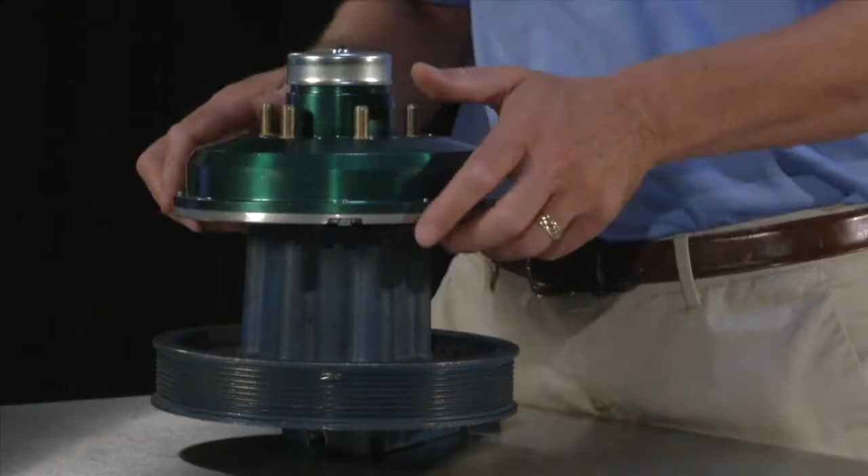All Kysor-style fan clutches are spring-engaged, but unlike the Horton-style fan clutches, where the pulley and clutching mechanism are one integral piece, these systems are always a two-piece design. The first piece is the hub, consisting of the pulley and the bracket. The second piece is the fan clutch itself. Once the two pieces are bolted together, you have the completed fan clutch assembly.

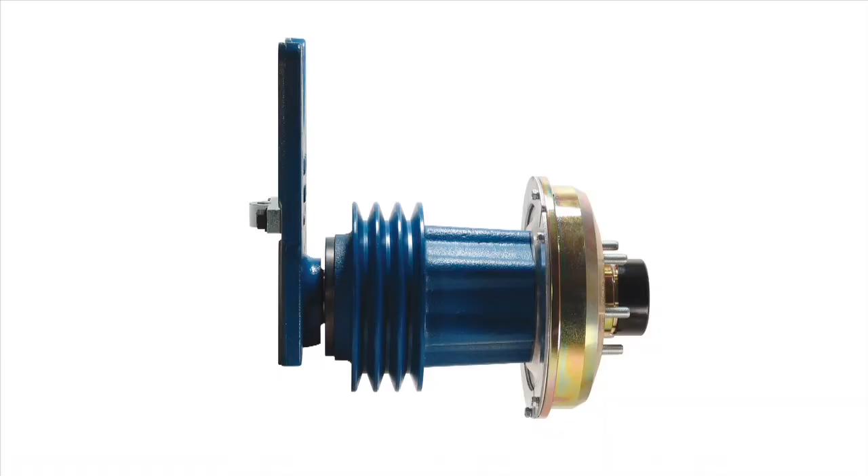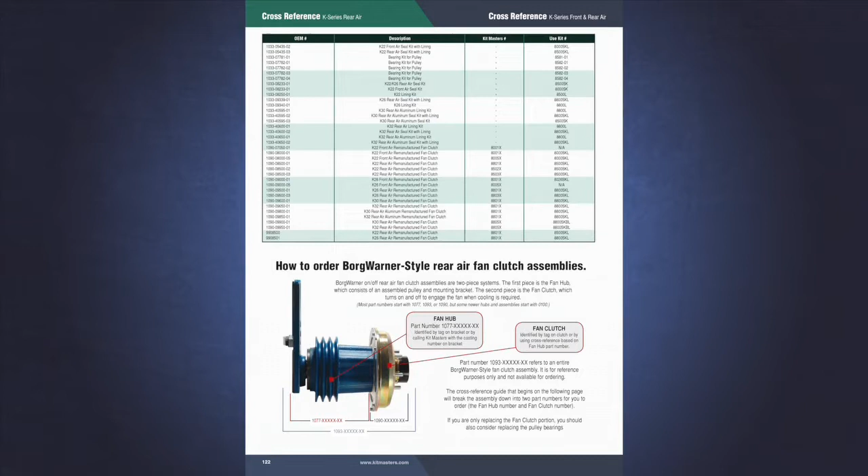Each of the two pieces in the assembly will have their own unique part number. Historically, the part number for the hub will begin with 1077, and the part number for the clutch will begin with 1090. The part number for the complete assembly will begin with 1093. In the Kitmasters Cross-Reference Guide, online or in the catalog, you can use these part numbers to find the appropriate Kitmasters kit, remanufactured fan clutch, hub, or assembly.

All Kysor-style fan clutches use a conical or wedge-shaped friction material, which helps to reduce slipping on engagement.

Although Kysor-style fan clutches are all spring-engaged and always two pieces, there have been various improvements to the design of the fan clutch itself over the years, and therefore changes in the part numbers. Here we will present a history of the progression of the fan clutch, their part numbers, and the technical changes. Understanding the changes will help you identify the proper remanufactured fan clutch or rebuild kit that you will need to use. As we go through the part numbers, you will notice that they are all indexed with a series number like K22 or K30. For this reason, these fan clutches are also referred to as K-series fan clutches.

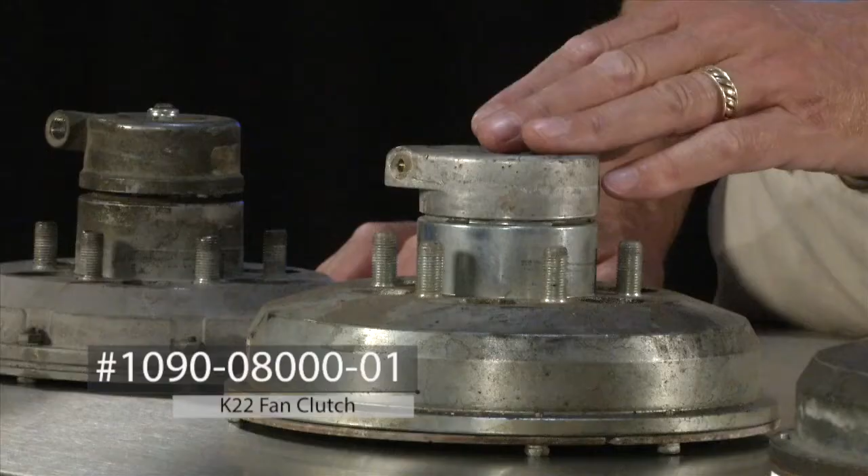The first of the K-series fan clutches was part number 1090-08000-01. This is considered a K22 fan clutch. There were several versions of the Kysor fan clutch prior to this; however, they were smaller, less durable, and quickly replaced by the K22.

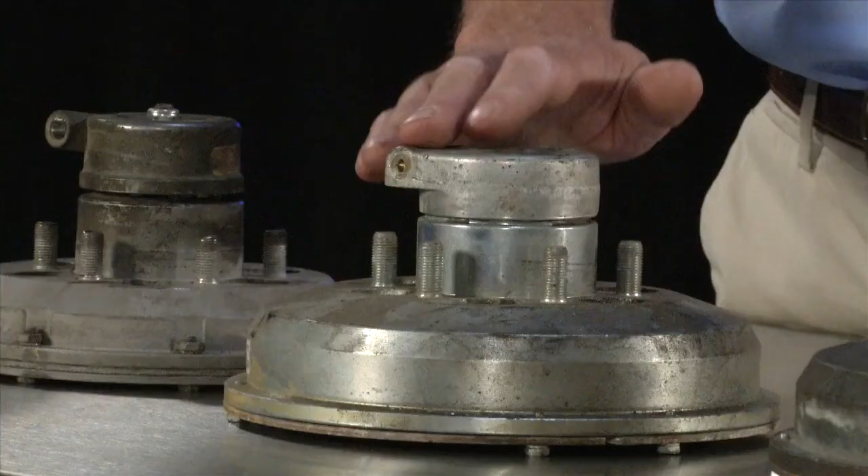The 1090-08000-01 is a front air fan clutch. This means that the air is supplied to the fan clutch through an air line that routes between the fan blade and the radiator and enters a port located at the front of the fan clutch. This fan clutch can be replaced with Kitmasters 8001X.

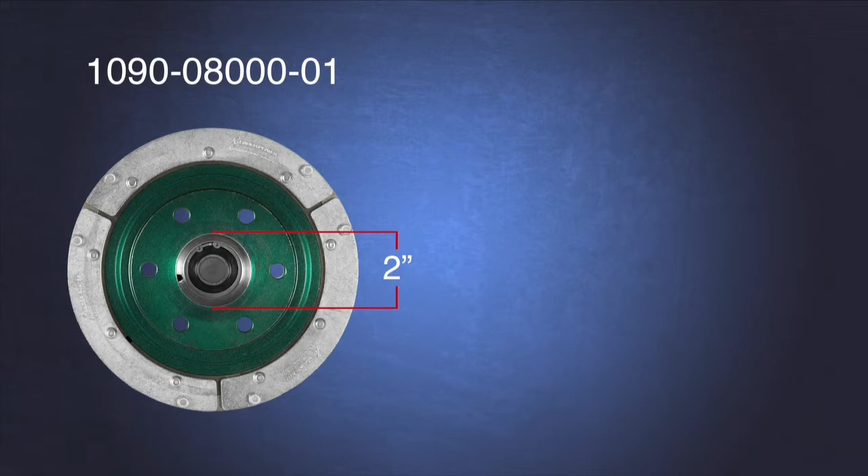The 1090-08000-05 is nearly identical to the 1090-08000-01, but has been specifically designed for Mack applications, since Mack bolts this fan clutch directly to the water pump. The only difference between the 1090-08000-01 and the 1090-08000-05 is the rear mounting pilot. The rear mounting pilot on a 1090-08000-01 is 2 inches, while the 1090-08000-05 is 2.56 inches. This fan clutch can be replaced by our 8005X.

There are also 3 rebuild kits for the 1090-08000-01 and 1090-08000-05: the seal kit, 8000 SK; the lining kit, 8000L; and the seal and lining combination kit, 8000 SKL.

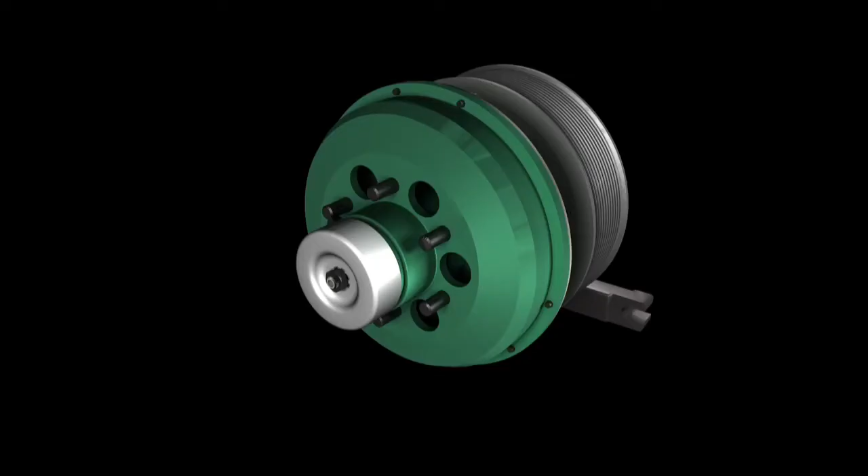By the early 1980s, the Kysor-style fan clutch was gaining popularity, but customers were complaining that the airline routing into the front of the fan clutch was burdensome, and because the airline would have tension on every engagement, it was a primary cause of failure. In 1985, the K22 fan clutch was re-engineered so the airline would route to the rear of the pulley instead of the front of the fan clutch. With this change, the air moves through a shaft in the pulley and is transferred to the fan clutch shaft at the rear of the fan clutch, hence the name change from front air to rear air.

The part number for this fan clutch was 1090-08500-01 and can be replaced with Kitmasters part number 8801X.

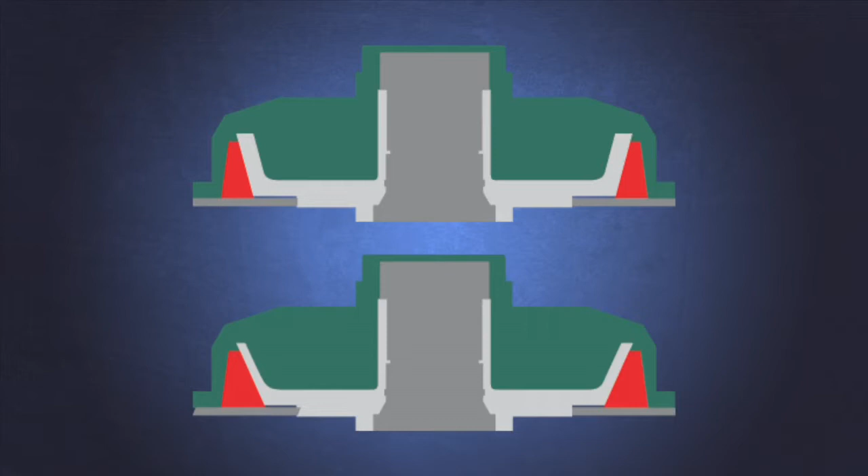While the 1090-08500-01 was successful for over a decade, by the early 2000s, fan blades were getting larger and the new fans were requiring more torque from the fan clutch. Borg-Warner addressed this by changing the angle of their wedge-shaped lining.

A steeper angle created more force and therefore more torque to engage the fan blade. The resulting part number was 1090-09500-01. This fan clutch can be replaced by Kitmaster's part number 8801X. You will notice this is the same as the replacement for the 1090-08500-01.

Since the change in the friction material is an upgrade and all the external dimensions are the same, Kitmasters automatically upgrades you to the newest design. Just like the friction material of the rear air Kaisers was upgraded to create more torque to drive larger fans, the front air Kaiser-style fan clutches were upgraded as well. The 1090-08000-01 was upgraded to the 1090-09000-01. Once again, this fan clutch can be replaced with the 8001X.

This was the final version of front air Kaiser-style fan clutches. They are no longer offered on new vehicles, but replacement units are still available from Kitmasters.

So let's look back at all of the front air fan clutches. The 1090-07050-01, 1090-08000-01, and 1090-09000-01 can all be replaced by Kitmaster's part number 8001X.

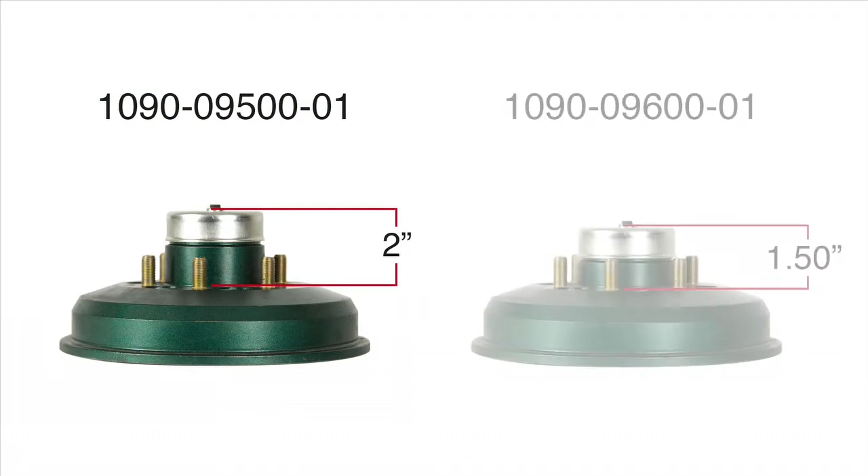The length of the nose on the 1090-09500-01 is 2 inches, while the air chamber on the 1090-09600-01 is only 1.5 inches. Once again, this fan clutch can be replaced by Kitmaster's part number 8801X.

The current version of the rear air Kaiser-style fan clutch is the 1090-09650-01. This fan clutch is identical to the 1090-09600-01 with the exception of the friction material. The friction material formula was changed to create a superior lining.

As with previous versions, and since Kitmasters is constantly improving its products, this fan clutch may also be replaced by Kitmaster's part number 8801X.

In an effort to decrease weight, Borg-Warner produced some fan clutches with the outer shell being made of aluminum instead of steel. While this achieved the desired goal, it brought forth a new problem: premature failure. In the next section, we will discuss this problem and show you how Kitmasters solved it, but for now, we'll just stick to identifying these fan clutches.

Besides the aluminum outer housing, another distinguishing trait of the 1090-09900-01 is that it has a 5-inch fan pilot instead of the standard 2.56 inches. These two features should make identifying this fan clutch a breeze.

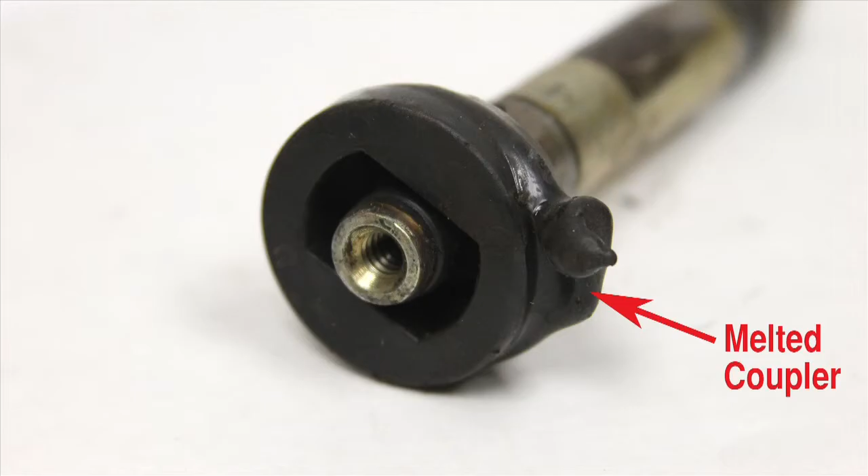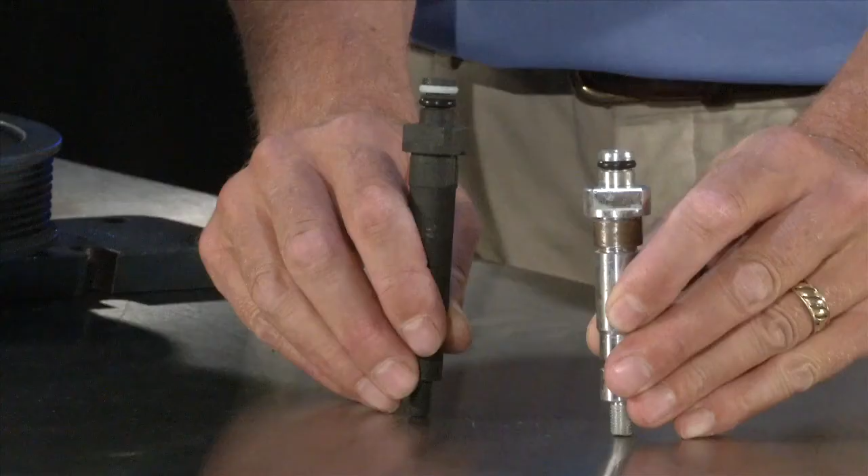To solve this common cause of failure, KitMasters has increased the length of the rear air shaft and added a second O-ring. The redesigned rear air shaft is beneficial for a few reasons.

First, the increased length of the shaft improves stability at the connection point, which reduces the amount of vibration that has to be handled. Second, the additional O-ring is made of urethane, which is specifically designed to seal in an environment that incurs motion. Third, the primary seal material is upgraded from NBR to Viton.

While NBR is a very common and good sealing material, Viton is specifically designed to perform in high heat applications. Viton is rated to 400 degrees Fahrenheit, while NBR is only rated at 250 degrees. With the high underhood temperatures that heavy-duty vehicles are faced with, Viton is a better choice.

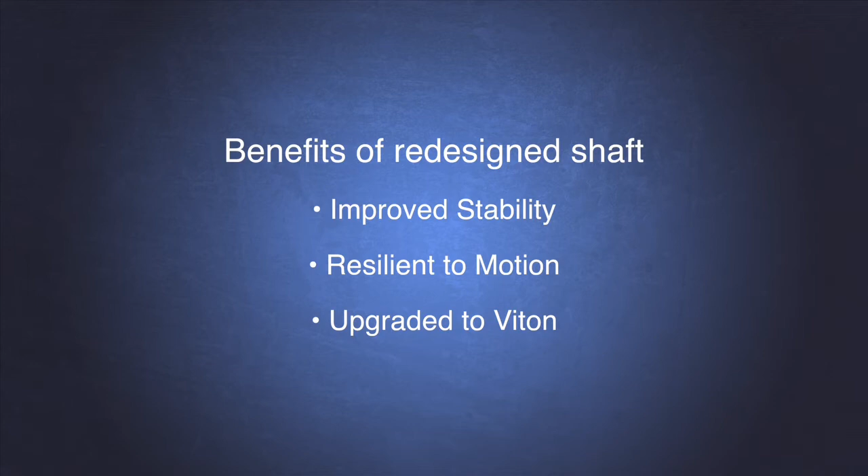The addition of the urethane O-ring and changing to Viton for the primary O-ring has solved the issue of premature fan clutch failure due to air leaks at the rear air shaft.

In a recent attempt to make a lighter version of the Kaiser-style fan clutch, the fan clutch housing material was changed from steel to aluminum. You might remember from the previous section that this was part number 1090-09900-01. This change in material caused an unintended negative consequence and a new common cause of failure.

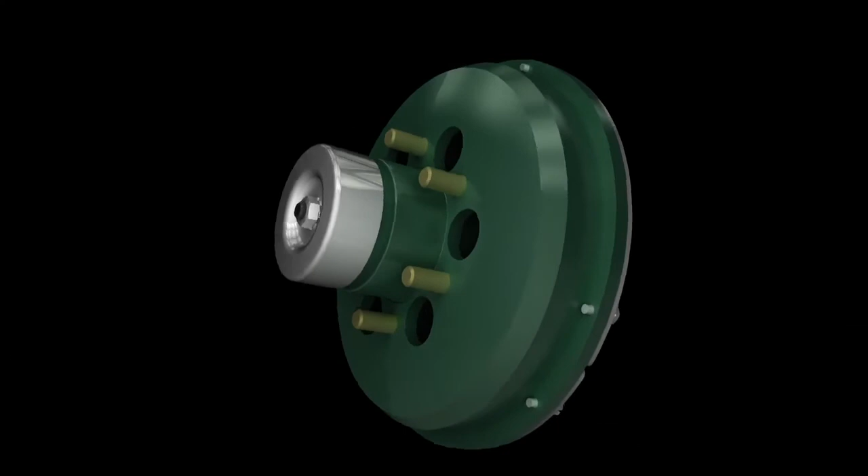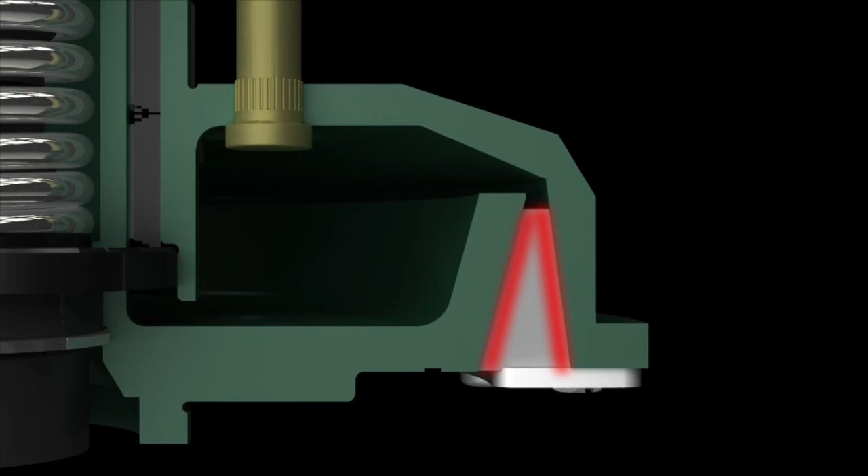In the previous steel design, when the fan clutch engages and the floating wedge-shaped friction material contacts the steel inner and outer housings, there is energy created by the friction contacting the inner housing. The energy is transferred to the friction material, where it is absorbed by the slow wearing of the friction material. The friction material is the proper and intended wear point.

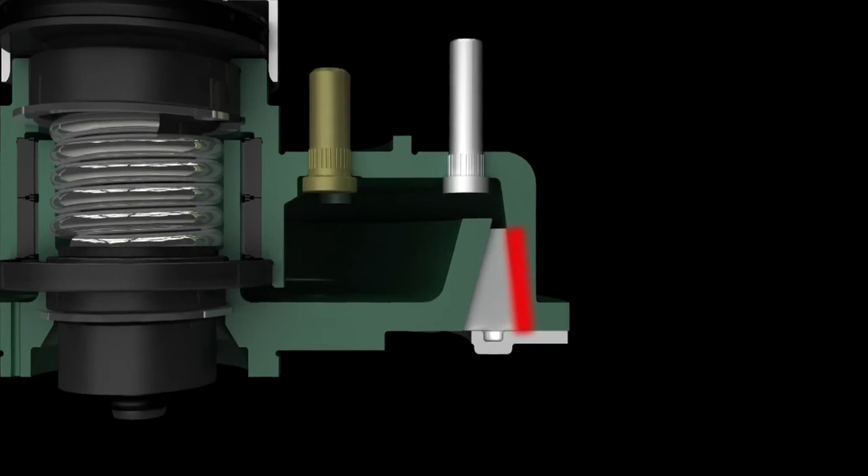In the aluminum design, when the fan clutch engages and energy is created between the friction and inner housing, the energy is transferred through the friction and is absorbed by the inside of the outer housing, causing significant wear to the aluminum material. This wear causes an out-of-tolerance situation, which leads to rapid wear and fan clutch failure. Wear in the fan clutch body also means that the fan clutch is no longer suitable to be rebuilt with a kit, as the degraded housing will just cause the new friction to wear prematurely also.

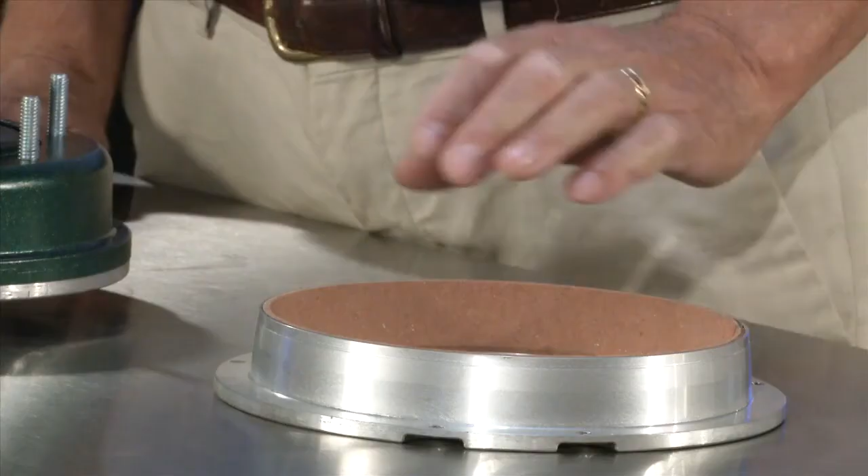KitMasters solves this problem by changing from a floating wedge-shaped friction material to a bonded wedge-shaped friction material. The bonded friction material creates a barrier between the friction and the outer housing, which changes the flow of energy transfer, so all the energy is transferred into the friction material and all the wear happens at the friction material and not at the housing. The friction is the proper and intended wear point.

Because we are creating a barrier between the friction and worn housing, the wear in the housing caused by the previous design is irrelevant, and these fan clutches may again be repaired with a kit.

KitMasters offers 3 solutions for K-Series aluminum fan clutches: an aluminum remanufactured fan clutch, part number 8805X; a seal and lining rebuild kit with bonded friction material, part number 8800 SKBL; and a lining-only kit with bonded friction material, part number 8800BL.